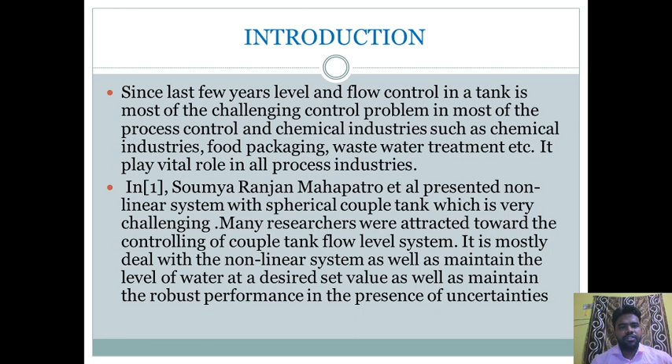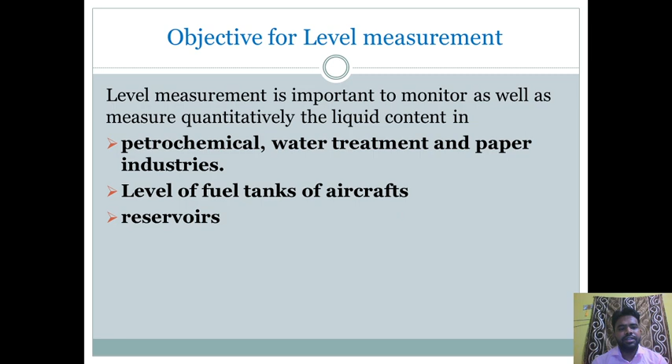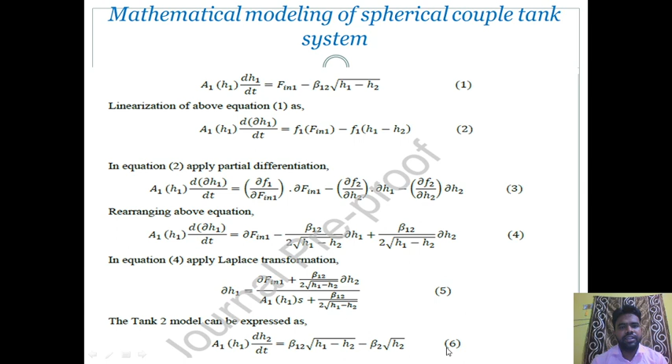By taking partial differentiation and rearranging the above equation, we can find this equation by applying the Laplace transformation. Similarly, for tank 2, the model can be expressed as this equation. By combining equation 1 for tank 1 and equation 6 for tank 2, we can get the transfer function, which I have put into MATLAB, and finally simulated to get the result.

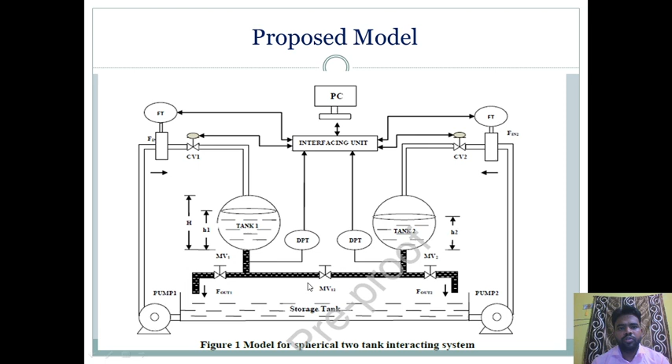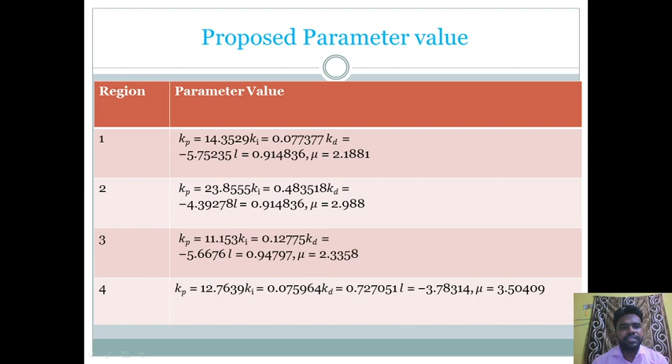Finally, let us go to our next slide. This is the proposed parameter value which I have put into MATLAB. My proposed data is Kp equal to 14.3529, Ki is 0.077377, and Kd is minus 5.75235, and my lambda is 0.914 and mu is 2.1881. By putting these values, I have got a better response compared to some references. They have done it in a good way, but I have got the most perfect response for this model. I am going to show that. Let us move to our next slide, this is our result and simulation section.

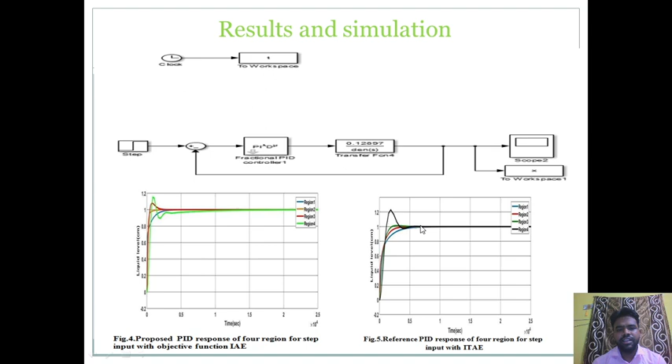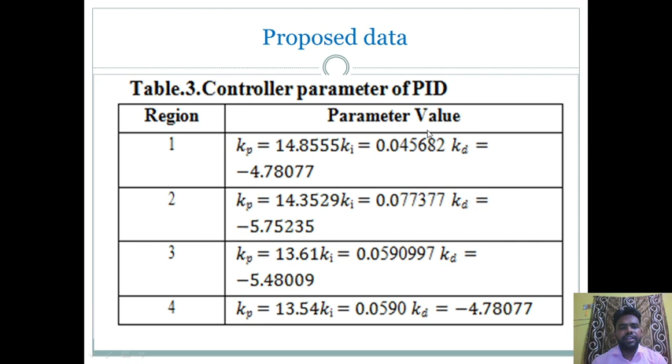Then proceed to next slide. Finally, conclusion. In this topic, a fractional order proportional integral derivative controller is proposed to control the flow of liquid in a coupled tank system, which is very useful in petrochemical, water treatment and paper industries, and many others. We can use it in aircraft also.

As well as we can use it in chemical industries. Many pharmaceutical chemical industries for making medicines can also refer to this level control.

Here, a spherical tank is used due to its high storage capacity. There are many researchers using cylindrical tanks, some triangular tanks, but I have used a spherical tank due to its variation. Because in a spherical tank, at one position there is variation in its surface, which adds more non-linearity to the system.

Finally, a comparison is done between the conventional PID and FOPID. Then I find out the rise time, peak time, settling time, and peak overshoot. At last, I perform with the objective functions to see which one shows the better result. In my research, IAE, integral absolute error, has better performance indices compared to other objective functions.

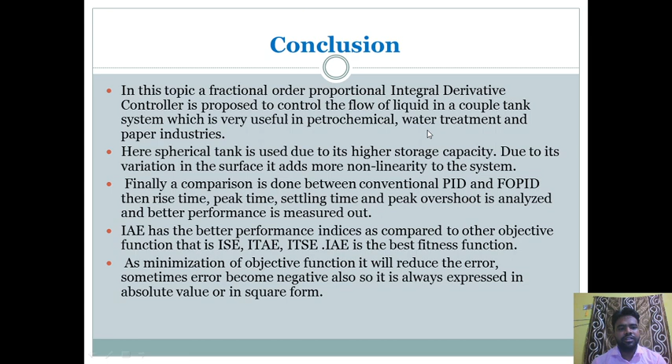And finally, by summarizing all this conclusion, I am going to end with references. These are the references that I followed, which helped me and finally gave better results. Among these is the optimal design of a fuzzy PID controller for an inverted pendulum system.

In this inverted pendulum, these use a fuzzy PID controller, and these are the novel fuzzy fractional order PID controller for non-linear interacting coupled spherical tank level process. I've referred to these papers, as well as taken some ideas from all of these references.